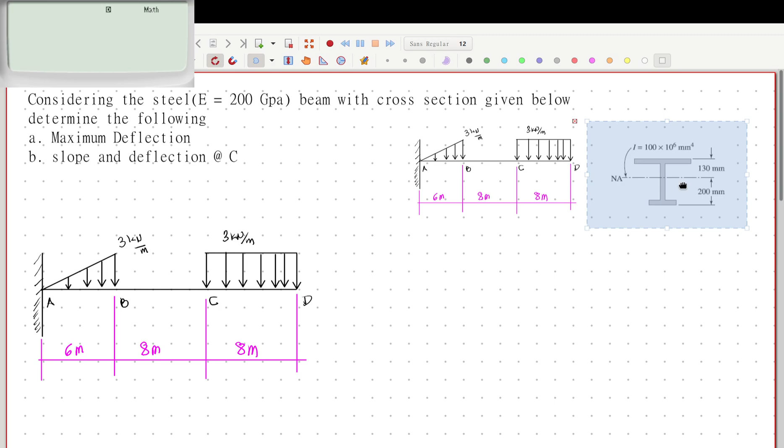Let me copy this so we don't waste time. This is a fixed support, so I can replace this support with its corresponding support reactions.

This moment, I'm assuming it's counterclockwise, so this is moment A, and then I have AY. I know there's also AX, but if I do summation of forces along X, I can just get that AX would be equal to 0.

So for reactions, step 1 is to do summation of forces along Y, this is equal to 0. You will get AY, that's positive, minus 3 multiplied by 6 over 2 - that's base times height over 2 - minus 3 multiplied by 8. This is equal to 0.

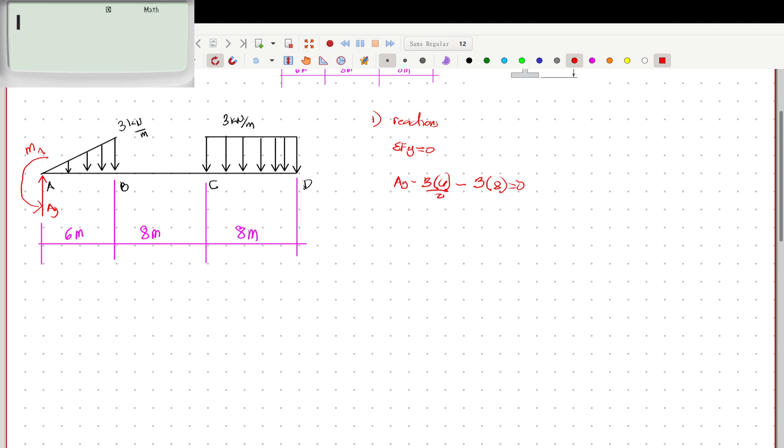On my calculator: 3 times 6 over 2 minus 3 times 8. Oops, sorry, that's wrong - no, but minus 8, I should have added this since I transferred it to the other side. So I will get that AY would simply be equal to 33 kilonewtons.

So if this is 33 kilonewtons, AY, I can replace this value with 33 kN here in the diagram. Now let's just get the moment.

So that's step 1. Now, summation of moment at point A, this would be equal to 0. I'm taking moment at point A. I will have MA - I assumed it's counterclockwise, so it's negative - plus the clockwise triangular load.

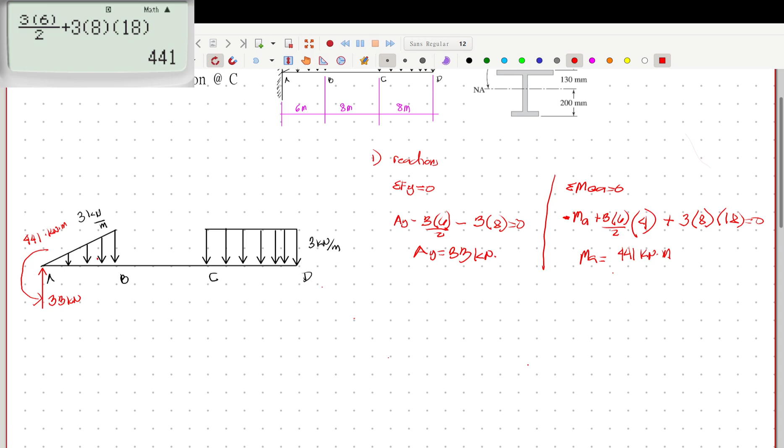So to neutralize, to add, to make sure I satisfy the requirement, I need to make sure this load here - let's color it red - I will extend it to the end. Of course, it should have the same slope, so the equation of this small triangle would be the same as the equation of the whole triangle.

So what I need to add should go straight there. So what I'll add is this, small, same as the beam. This kind of load is what I need to add, because when I do this, when I add this, this load will now be a single triangular load that ends at my free end or at my last section.

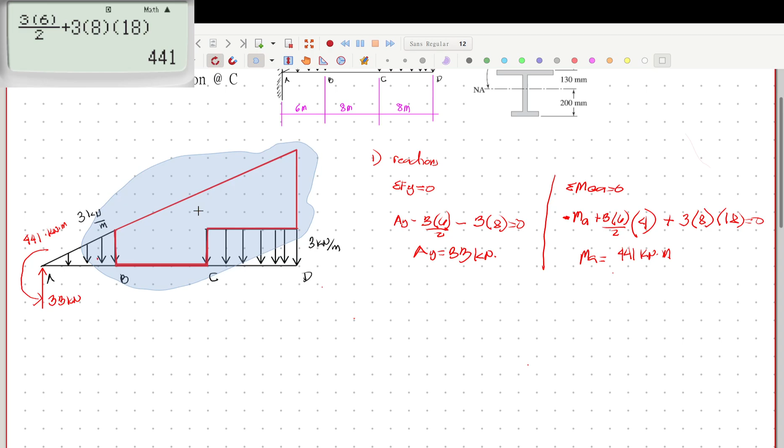So let me just make a spline here. Okay. Let's pin that. What I added is this. Let me just remove something else here. What I added on top is this.

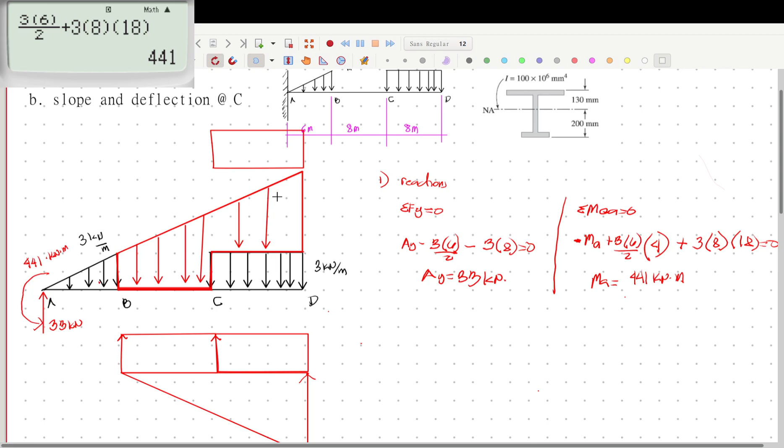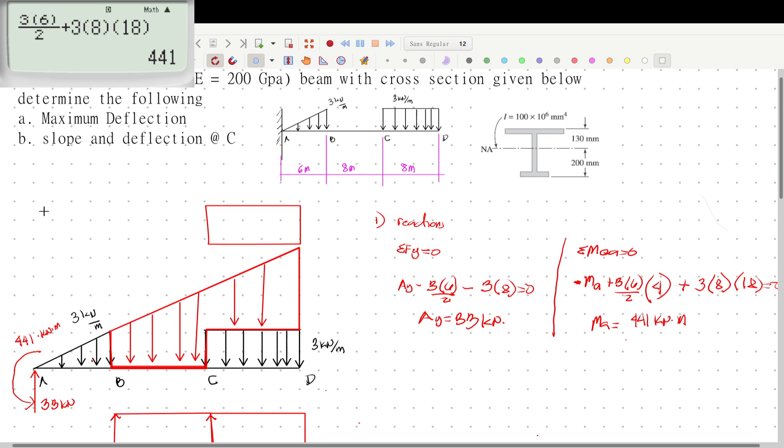Kopyahin ko lang siya, ilagay ko siya dito. So ngayon, okay na tayo, nadagdag na ako. Check ko na lang ulit.

Itong load na to, yung rectangular load, dumiretso dito sa dulo, goods. Triangle, dumiretso, goods. Itong bago kong dinagdag, umabot sa dulo, so lahat okay na. Tandaan ko na lang, eto pababa, eto pataas. So ngayon, check natin.

Lahat dapat may values, no? Kanina, alam natin, palitan ko yung kulay. Ito, this is 6 meters, this is 8 meters, this is also 8 meters. So yung ating similar triangle, ito. So ito is 6 meters, tas ito, 3 kilonewton.

In-extend natin hanggang dulo, tapos ito, extend din natin. Tapos yung kabuuan, ito, hanggang dito. This distance is 6 plus 8 plus 8, and that is 22. Tama ba? 6 plus 8, that's 14, plus 8 is 22.

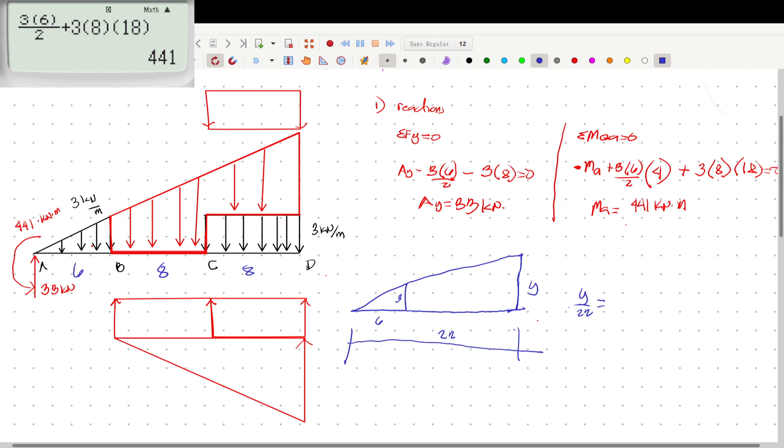So ngayon, by using your calculators, or if I say that this value, itong height na to, is y, so we'll just have 6, y over 22 is equal to 3 over 6. So ngayon, I will get that y is equal to 3 over 6 times 22, di 11 lang yan. Okay, this is

11. So kung 11 yan, itong buong to is 11 kilonewton. So if this is 11, itong maliit na to, that is 8.

Okay, ngayon, let's yung iba naman. So etong rectangle na to, malamang yan 3 kilonewton per meter lang din yan. No, so if this is from this point to this point is 3 kilonewton, dito hanggang dito is also the same as this length hanggang dito. That is 11 minus 3, ano, 11 minus 3, and this is just 8 kilonewton per meter.

Ngayon, para hindi tayo malito, extend ko na lang yung line na yan. Tapos eto, gagawin ko na lang 8 kilonewton per meter. Same lang naman yan kasi yung buong y, yung buong to is 11. So eto dapat yung 11, 8 plus 3. So eto, yung dinagdag ko sa taas, this is also 3 kilonewton per meter, kasi etong area na to is just the same as this area.

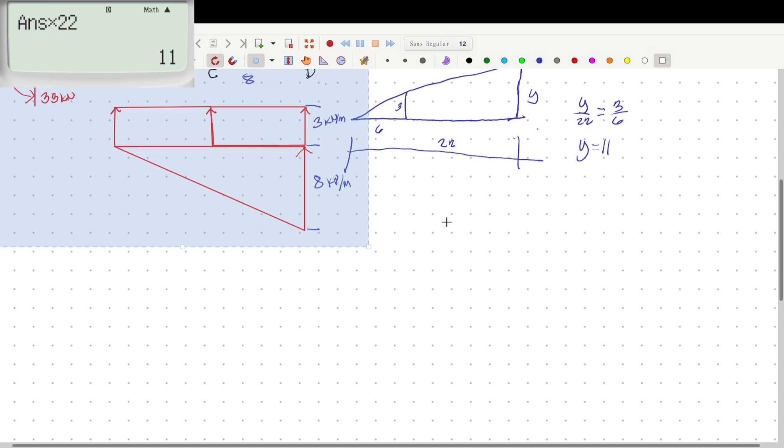So ngayon, pag alam ko na yan, let me just copy it again para hindi ko na kailangan babalik-balikan mamaya. So ito siya. Okay, copy natin yan, lagay ulit natin dito. Ayan.

Hinapin ko lang, no? So ngayon, let's now make the global moment equation. So tapos na tayo sa reaction, second step pa lang to. So second step, ayan, is the global moment. Ito yung bracket method, no?

Moment equation. So global moment equation would now be, putol tayo sa dulo. Siyempre, ito yung cutting plane ko. Ito, sa last section, section CD. So make sure, one tip for you guys is that even after I neutralize, the number of sections before I neutralize and after I neutralize should remain the same.

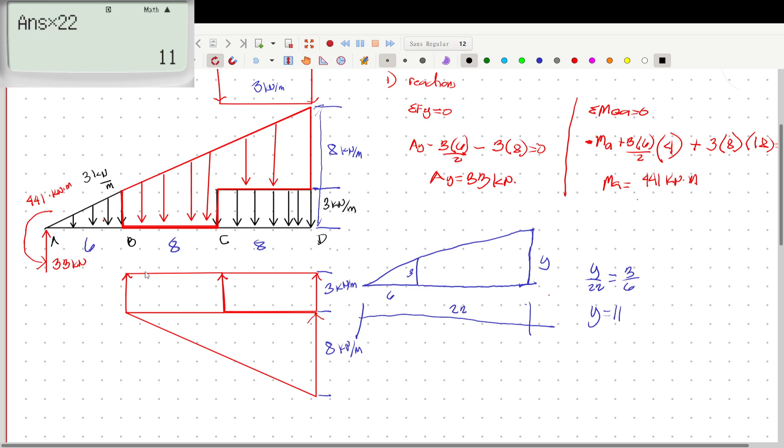So kanina, simple lang ang sections mo, ito yung loading mo, A, B, B, C, C, D. So kung papansinin mo dito, yun pa rin yung loading mo, wala kang nadagdag sa gitna. So A, B, B, C, C, D pa din. Okay, so ito yung section natin, ito yung cutting plane natin.

So ngayon, consider natin right and oops, this distance until this yan, dito yan, dito sumabra ako. Ayan, this distance is x.

Okay, so now isa-isahin na lang natin, no? Unahin natin, moment equation, this is equal to, this is counterclockwise, sa left ang kinonsider ko, counterclockwise yan. So this will now be negative 441. Tama? Negative 441 plus, sorry, minus.

So one tip is you can say that 441 and this is x raised to 0, pero that's just 1 kasi 441 x raised to 0 kasi para alam ko na ito x starts from x agad yan. So pagka ayaw mo gawin yun, okay lang naman. This is minus, again, this is we have a triangular loading. So start ako from left to right. Ulahin na natin pala itong plus na muna, plus 33x, no? This is 33 kilonewton times the distance x.

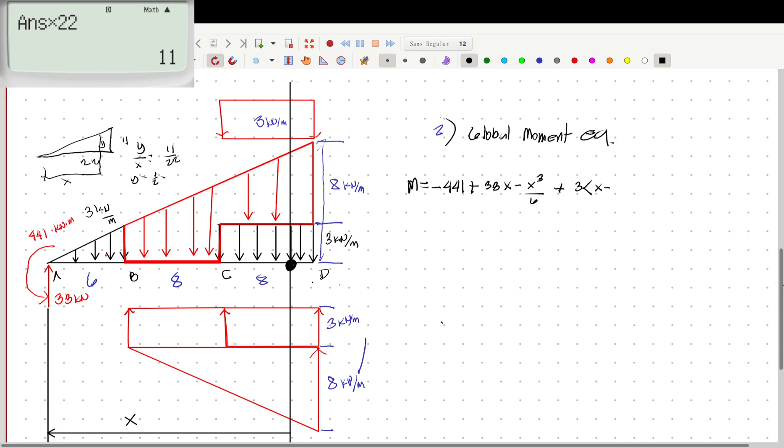So dito na tayo, unahin ko na yung rectangular loading. So pataas, plus 3 times bracket x minus 6, no? Kasi itong distance na to is x minus 6, no? So x minus 6, all over, this is 2, squared over 2. Tama, kasi x minus 6 over 2, yun yung moment arm niya.

Another plus, hindi ko na gagawing i-compute, no. Pero itong triangle na to, itong triangle na nasa baba, same lang yan dito. So hindi ko na kailangan i-compute, hindi ko na kailangan mag 8 over 16. Ang y mo would have the same relationship as x. Pero kanina kasi x, ngayon x minus 6, kasi siyempre itong distance na to is x minus 6. So dito, this will just be x minus 6 cube, tama, over 6. Bakit?

Sige, oo nga, biglang ganun, no? Kasi rin, so x minus 6, base yan. Height ko is x minus 6 over 2, diba? Kasi y is 1 half, no? So 1 half x, so this is over 2 multiplied by x minus 6. Kasi over 2 ulit. Wait, did we do something wrong here?

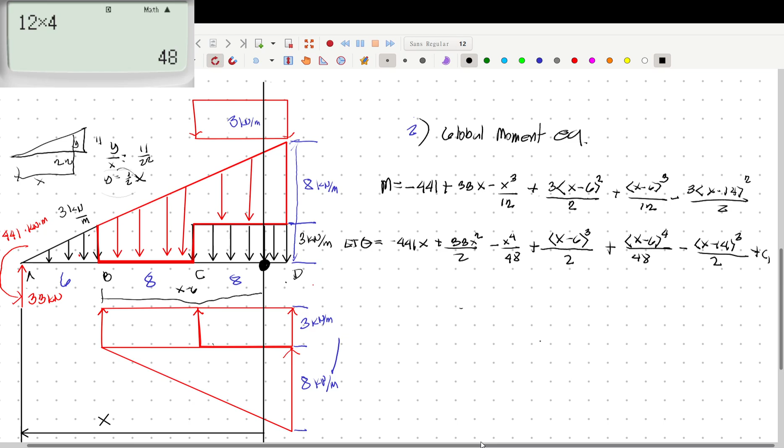Next, lastly, x minus 14. 14 cube, no? Cube over, so 3 over 2 over 3, so ganoon din, 2 na lang. Yung 3 dito na ibababa ko, makakancel nung 3 na dating nasa taas. So again, this is plus C1. So focus tayo dito, okay.

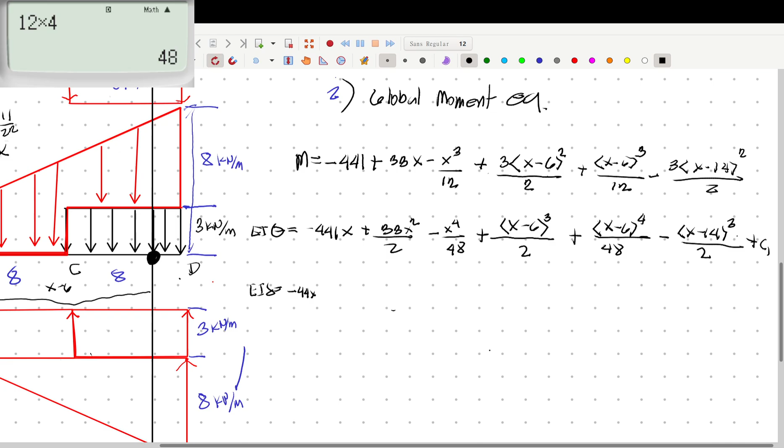So another round of integration, EI delta naman would be negative 441. Medyo i-zoom in ko nga para madaling magsulat. Ayan, integration would be negative 441. Wait lang.

EI delta would be equal to negative 441 x squared over 2 plus 33 times x cubed over 2 times 3. So ito, times 2 multiplied by 3, 33 divided by 3, I can just say that this is 11 over 2. Sinimplify ko lang para hindi na ako mahirapan mamaya mag-substitute. So x raised to, now this is 5 all over 48 times 5, that's 48 times 5.

This is 240. So, 240 plus quantity x minus 6 raised to 4 over 2 times 4, that is 8. Plus quantity x minus 6 raised to 5 all over 48 times 5, and that is 240. Another minus, x minus 14 raised to 4 over 8. Lastly, you will have plus C1 x plus C2.

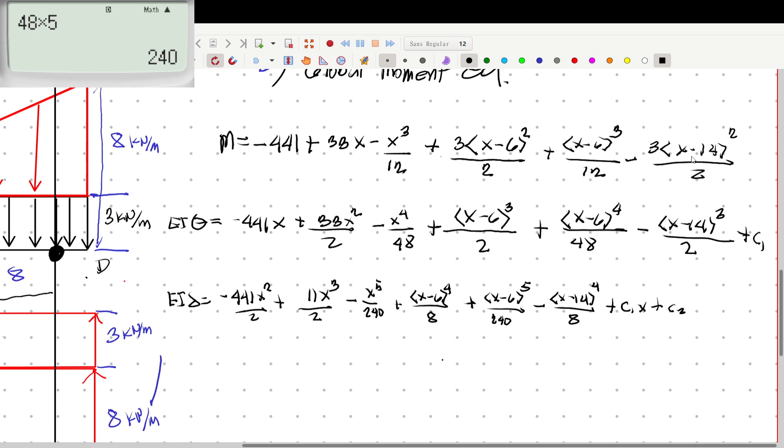So you have 1, 2, 3, 4, 5, 6, 7, 8. So check lang natin, 1, 2, 3, 4, 5, 6. Okay, so now I now have all my theta, slope, and moment global equation. Global theta, global delta, and global moment equations. So...

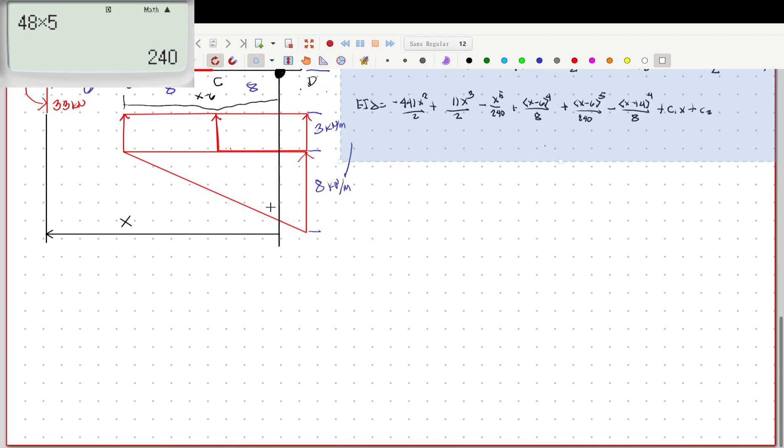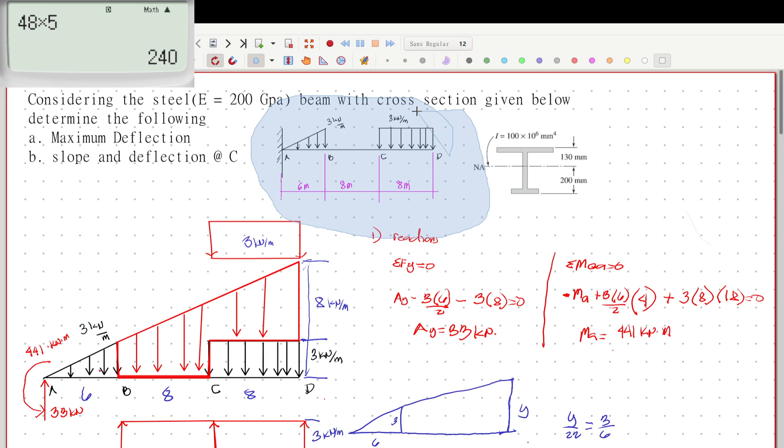Punta na tayo dito, okay. Now, para, kasi okay na, di ko na kailangan ng neutralize load. Ito na tayo, dito na tayo. Or hindi, sige, ito na lang tayo. Sabihin ko ulit to. Yan, pero palitin na lang natin kasi, ayan, kita naman na yan. Okay, now...

The next step here is I need to solve for my C1 and C2. So next step, tapos na ako sa step 2 and step 3, integrate. The next step, gawin na lang nila sayo para mas maganda tignan ngayon. Step 4, solve for C1 and C2, which would be solved by knowing your boundary constraints or boundary conditions.

So, boundary conditions niyan, ang boundary conditions is always based on support. Kasi at point A, I have a fixed support. So pag fixed support, eto siya, yung deflection sa fixed support, eto would be like this, no? Ang delta mo, 0. So at fixed support, ang A ko, X ko is equal to 0, so my delta must be equal to 0. And same goes with my slope, which is, sorry, my theta, which is also equal to 0.

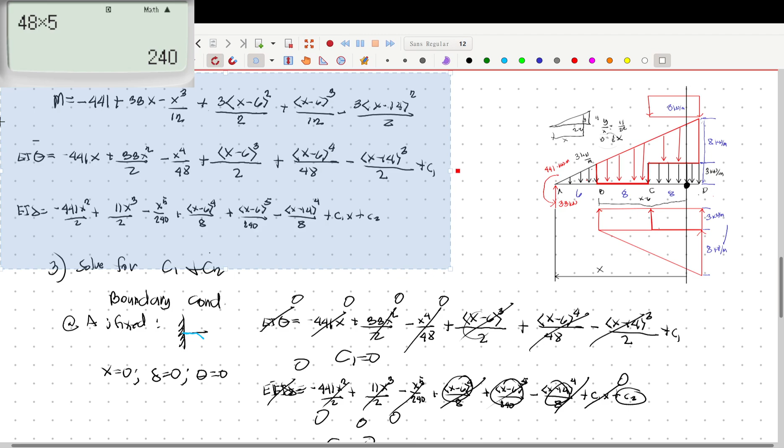So I now have my completed global moment equation with the correct value for C1 and C2. And that is the global moment and slope equation. Uy, hindi nasama.

C1 is equal to 0. C2 is also equal to 0.

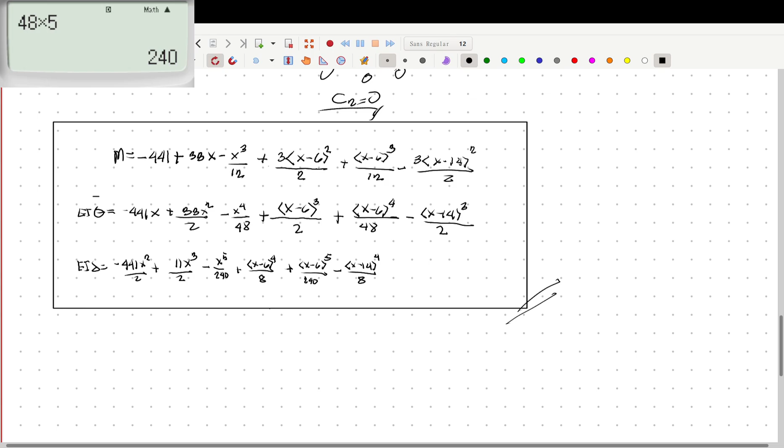So if may tanong sa inyo na find for the global slope and deflection formulas, ito na yung final answer. Pero hindi naman yun ang tinanong sa atin. Ang tanong sa atin, find the maximum deflection.

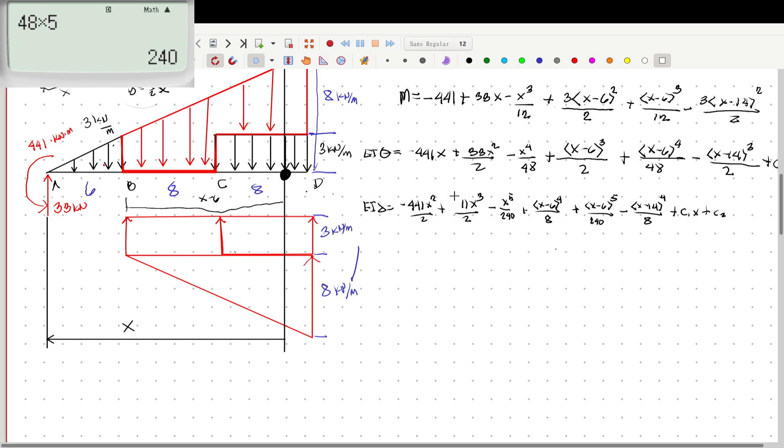So, maximum deflection. So when I try to look at itong cross-section, itong beam na to. Itong beam natin, knowing that it looks like this, the qualitative deflection, since fixed support yan, diretso lang.

Wait lang, when I just use a spline here. Okay, sorry, nawala. Ngayon, iburahin ko lang to para maganda tignan. Tapos itong ABCD, tanggalin ko na rin yan.

So ngayon, the deflection would look like, pagka since fix lang yan, dito lang tayo may boundary constraints. So siguro hanggang dito horizontal siya. Tapos dito bababa. Ilagyan na yun. Dito, hanggang dito. Dito.

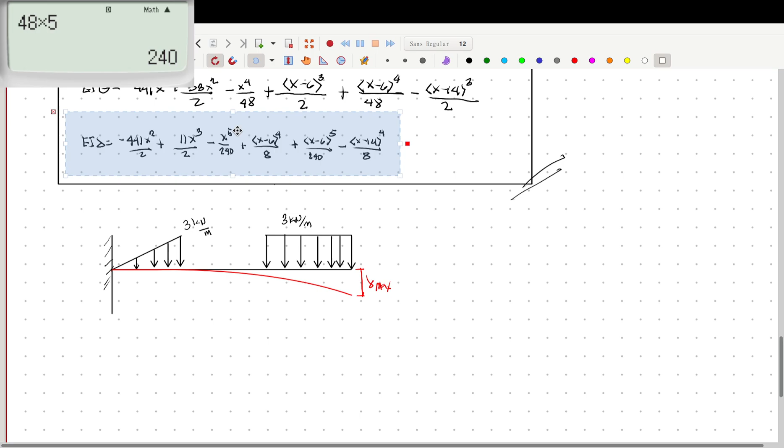So ito, isa lang ang merong choice ka, which is your free end. So delta max, to solve for the maximum delta, kunin lang natin ito, kunin lang natin tong equation na to. If I get this equation, I substitute 0 here.

So therefore, kasi 0 daw. Wait lang, palitan lang natin itong kulay natin ng black. Max delta is at x is equal to 22.

Kasi itong buong to, di ba, known niya na 22. Kasi 8, 6 plus 8, 14 plus 8 is 22. So max delta is at x is equal to 22. So let's just substitute 22 at everything. So ngayon, I got delta max is equal to, calculator natin.

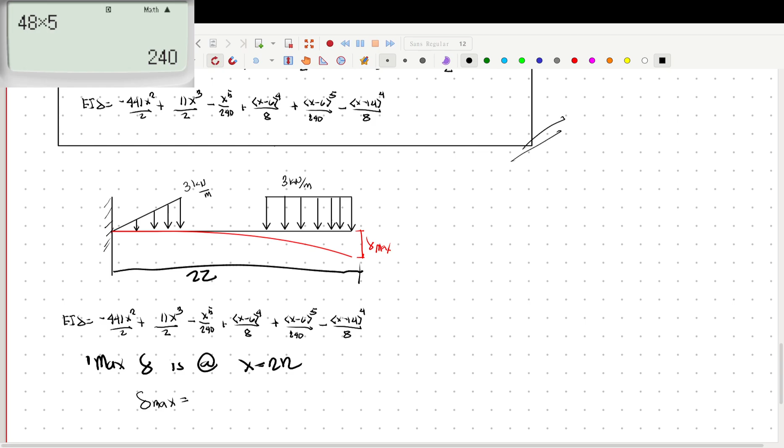So kita nyo ba yung screen mo? Wait, let me check. Okay, so dito, what I have is negative 441, negative 441 times x squared over 2.

Sinusulat ko lang, kasi itong free end na to, kasama lahat yan, kasi dulo yan na section. So I will need to include everything. So dito, 11 over 2 x raised to 3, cube. So plus 11 x cube over 2.

Minus x raised to 5 over 240, plus quantity x minus 6 raised to 4 all over 8, plus. Check ko lang ha, minus plus minus plus minus plus minus plus. Okay, well chinecheck ko lang kung tama yung pinaglalagay ko.

So dito na tayo. Dapat pwede kasi dito yung ano. So x minus 6 raised to 5 all over 240, minus, okay wait lang, malapit na mapuno. X minus 14 raised to 4 all over, uy di niya na kaya.

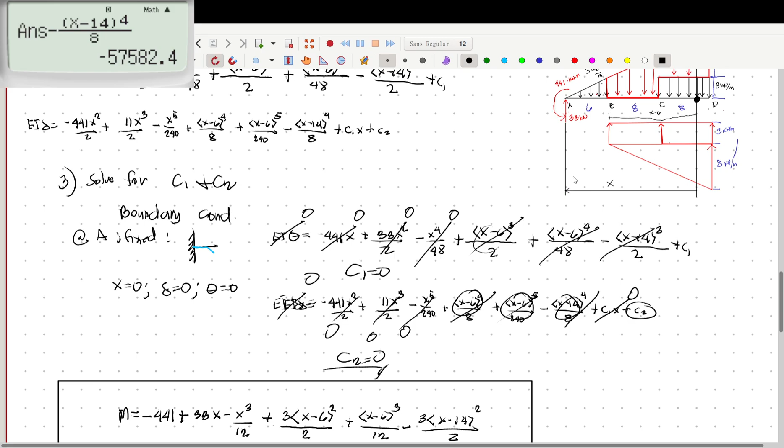Okay, the answer is, wait lang, negative 57582.4. And this is over EI. Ngayon, let's use the EI na given, ang EI natin as E is equal to 200 GPA. And I is, ito, given na yung formula, 100 times 10 raised to 6 mm to the fourth.

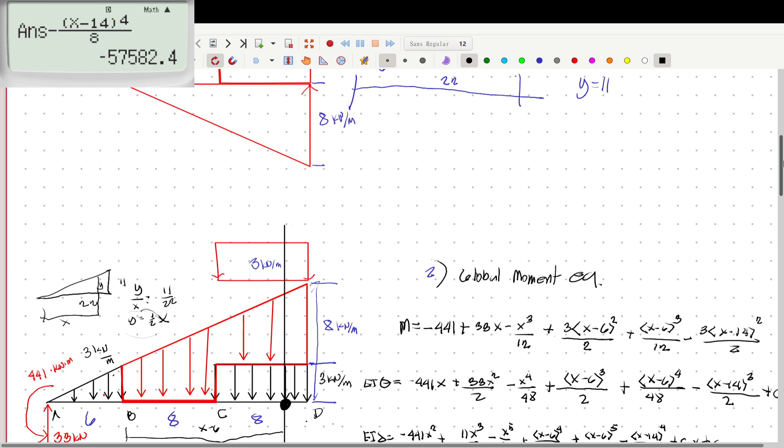So meron 200 GPA. I-convert ko na, no? 200,000 MPA. Ito yung E ko, EI. Ngayon, kung aalalahanin mo, this 441 is kilonewton meter times X is meters.

So kilonewton meter cube. Kung papansinin mo itong X, itong load, yung unit. Let's take an example: itong 441 x squared. Ang unit ng 441 is kilonewton meter, multiplied by meter square kasi itong x is meters. So ito yung unit niya, kilonewton meter cube.

Yung nasa baba is MPA, o kunyari gawin ko muna KPA, kilonewton per meter square. Tapos ito yung I ko, yung I is mm to the fourth, or basta length raised to 4. So m raised to 4. So cancel to, magiging m squared yan. Kasi over yan, cancel yung kilonewton. So m3 over m2, cancel, magiging 1 na lang yan. So the final answer would be in terms of length.

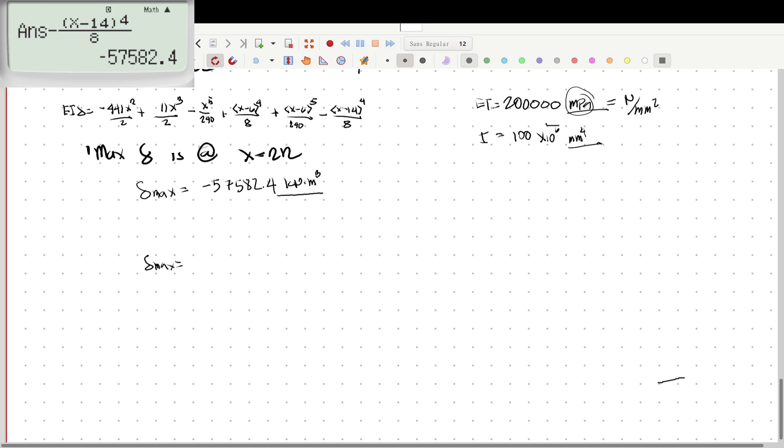Ito na lang i-convert ko. So delta max will just be equal to, let me just move this out of the way na lang pala. Okay, delta max would be equal to ito, yung EI substitute ko na, ang E ko, 200,000 Newton per millimeter squared, tapos multiplied by 100,000, ay 100 to, 100 million pala yan.

100 million, so 100 times 10 raised to 6. This is to the fourth. So ito, I will multiply this by, since yung kilonewton gusto kong maging newton, so 1,000. This is newtons per 1 kilonewton para mag-cancel out. Cancel out yan. Tapos I have meters.

So I need to convert meters into millimeters. So meters yan, meters. So ito, mm. There's 1,000 millimeters in 1 meter. So quantity, ito, cube, i-cube ko din. Okay, so lagay mo lang sa calc yan, no?

So answer, ito, multiplied by 1,000 times 1,000 raised to 3, all over 200,000. Tama? 200,000, wala nang conversion sa baba na mangyari. Times 100 times 10 raised to 6. And the answer is...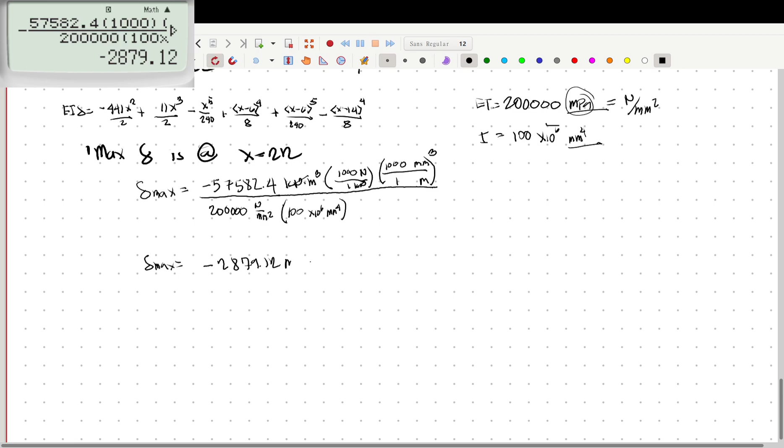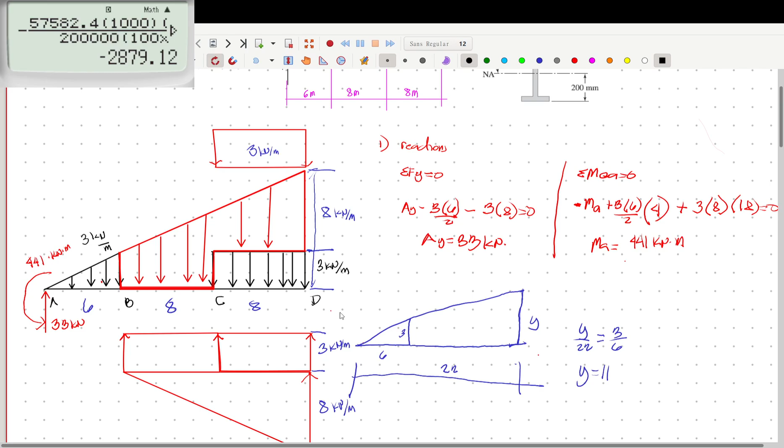So 2 meters yung deflection niya. That is just because itong mga values na to, itong mga load na to, gawa-gawa ko lang to. So baka sobrang laki talaga ng ginawa ko, unrealistic yung nilagay ko. And etong section modulus na to, masyadong maliit. Pero basically, in actual scenarios, hindi umabot ng ganito yung deflection. Pero in this case, since yun yung binigay ko na problem at yun yung binigay kong section modulus o section cross-section, ito yung answer natin.

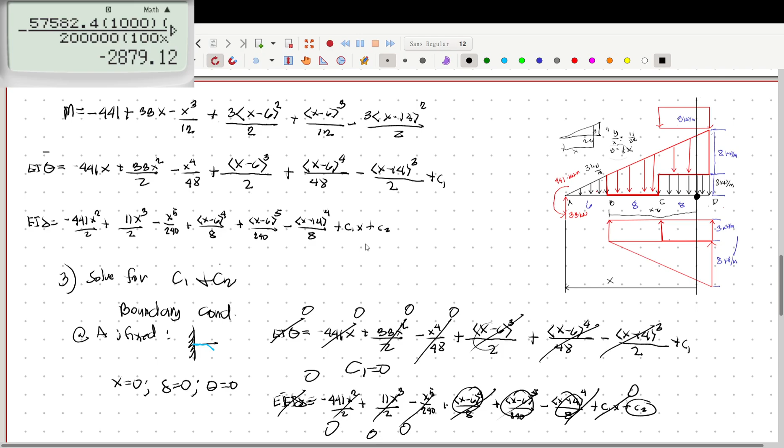So then, ang sagot is 2,879.12 millimeters. Pangalawa, doon na tayo sa, ano yung tanong niya ng pangalawa? Slope and deflection at C. So slope deflection at C, ito yung C. So ito yung kailangan kong makuha. What is delta here? Delta C.

Saka yung line na to, saka itong tangent line na to, this tangent line here. Tapos kuha tayo ng horizontal line. So ito yung theta C. So ngayon, kailangan natin yung delta C. Substitute lang tayo. So unahin na natin yung theta C, so sa theta C, that will just be this equation.

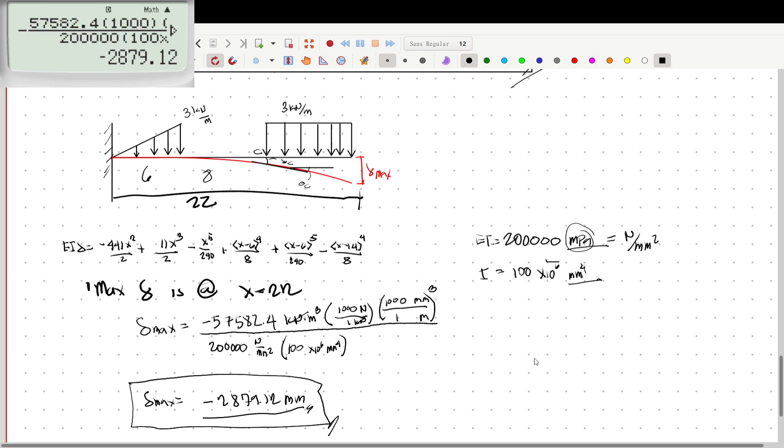Control C. Okay, so una, for theta C and delta C, just remind yourself, x is equal to, this is 6 meters, this is 8 meters, so that's 14. C is 14. X is equal to 14 at point C. So substitute lang natin yung 14 dito. So if I substitute 14 here, wait mo.

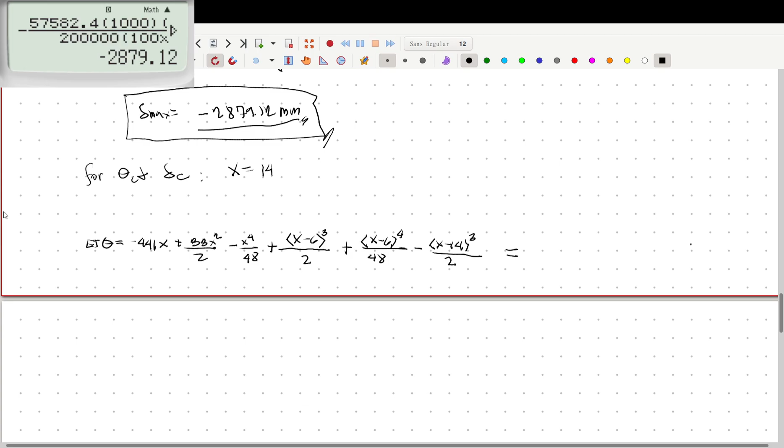Okay, so if I substitute 14 here, I will get that EI theta is equal to, substitute, negative 441x plus 33x squared over 2 minus x raised to 4 over 48 plus x minus 6 raised to 3 over 2 plus quantity x minus 6 raised to 4 all over 48. This value at the end will just be zero, so I won't include it.

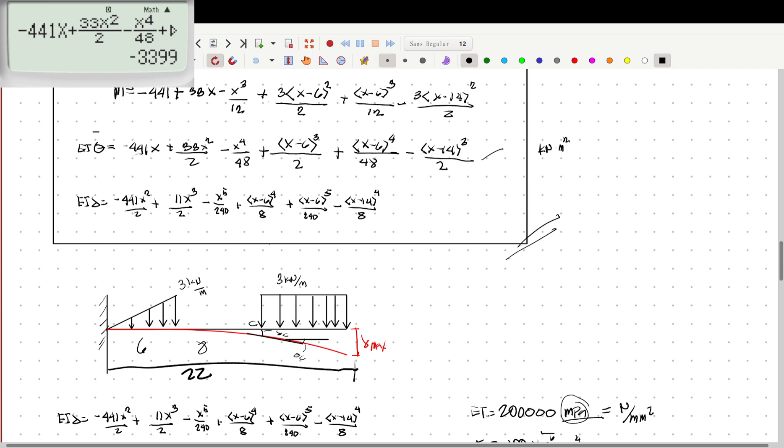So kilonewton meter squared. So what I'll do here is multiply by 1000, which is the conversion from kilonewton to newton. Then square this again for the meter to millimeter conversion. So it should be squared. Divided by 200,000 multiplied by 100 times 10 raised to 6.